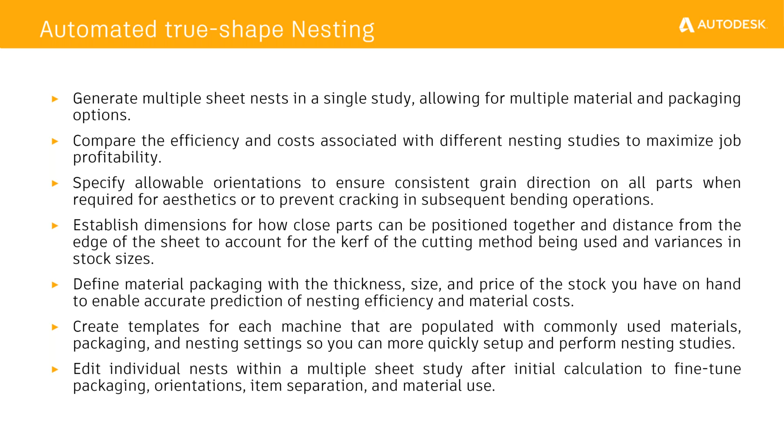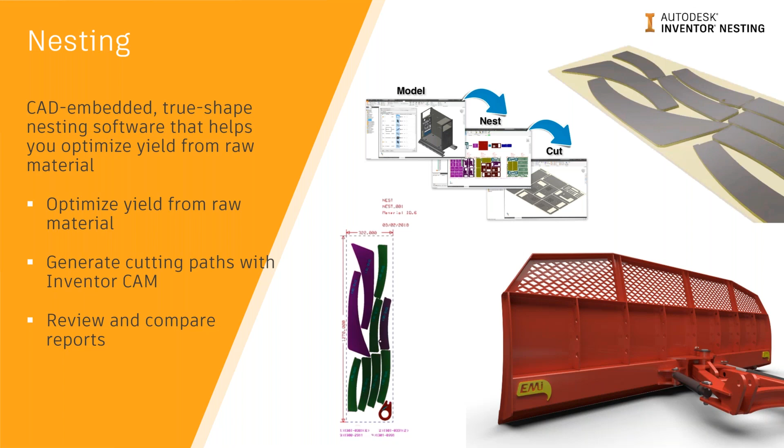Nesting not only reads 3D models and automatically detects flat patterns, but you can also bring in DXFs, which are basically 2D drawings. If you have profiles created in AutoCAD, they can be added on to the nesting, something like a filler part. So nesting is going to use even the 2D profiles, not necessarily 3D, to lay out the nesting for you. As I said, associativity between 3D modeling and the generated nest makes sure that all changes are reflected and taken care of automatically.

All the nesting layouts that are generated can also be exported as a DXF file if that is the format that you need to feed into your CNC machine or the machine that is going to cut it. Or you can use the 3D layout of the nest and generate the NC code using Inventor CAM. And naturally, since it's a professional tool, it also gives you nesting reports, which are very useful to share with the manufacturer.

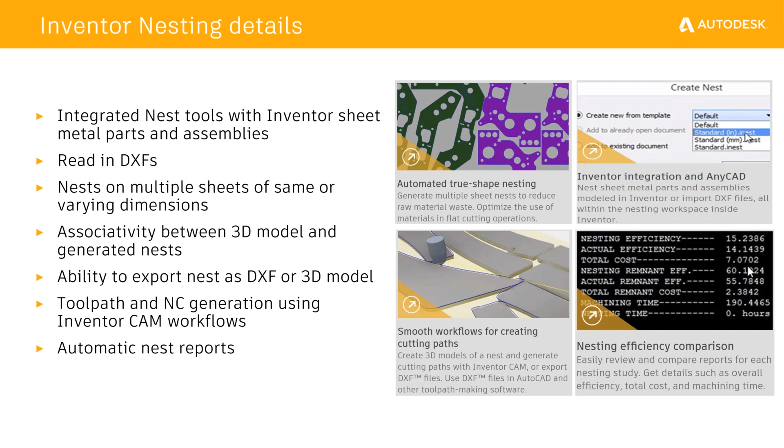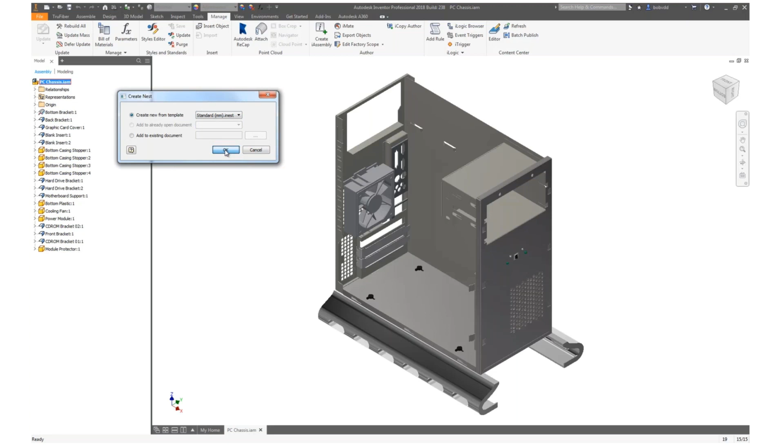Now I will take you through a small example of how Inventor Nesting works through this short video. On the screen, what you see is a CPU console enclosure, which is basically sheet metal. It contains both sheet metal and non-sheet metal parts. To start, we just say create nest and choose the template; in this case, I'm using a metric template. Now nesting is automatically going to detect all the flat patterns as well as the material. Let me just roll it back a little bit to show you. I'm going to pause it here.

Now you see Inventor Nesting has automatically detected two kinds of material. One is mild steel and another is aluminum. But it is showing three categories. Why? Because the mild steel is in two different thicknesses. So nesting segregates it based on the material and the thickness of the material. So effectively in this nesting study, it should generate three different sheets and lay out the flat profiles that need to be cut.

Okay, so let's move ahead. All the flat patterns are automatically detected, and nesting brings them inside the nesting environment and lays them out in front of you. So these are the things that need to be nested.

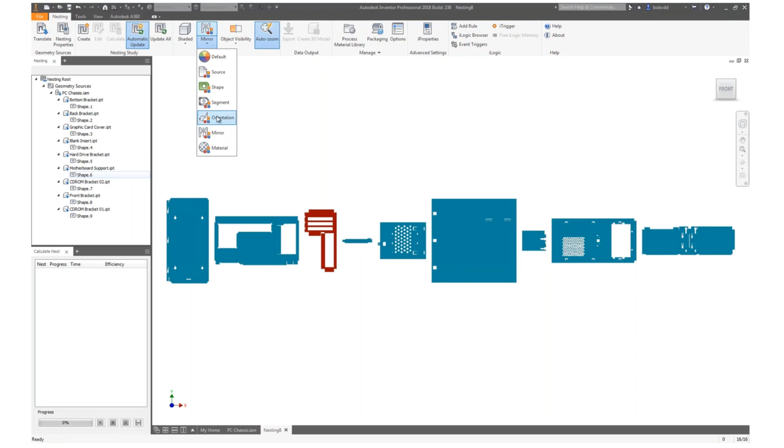The next thing is we just create nesting properties, and you can see it has automatically taken the quantities as well. And here is where you can modify the orientation or the rotation, mirror, etc., to make sure you have the right orientation. Now, you can easily see what has been mirrored and what has been tilted by using the choices as you can see on the screen. So you know which has been modified.

Okay, now the next thing is the packaging. In nesting, it allows you to define the packaging. Packaging is nothing but defining the sheet, the size of the sheet, from which these pieces will be cut. So I have created a couple of packagings, as you can see, 2, 3, 4, etc. So I'm going with the standard, and I specify the job quantity, in this case 5 numbers, and let's go ahead and do the nest.

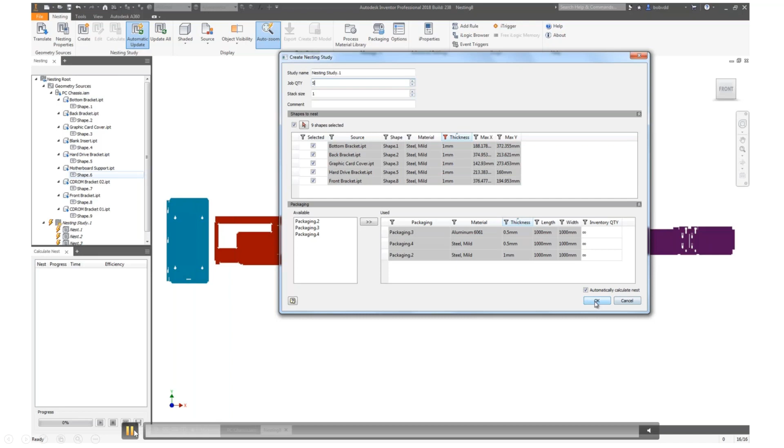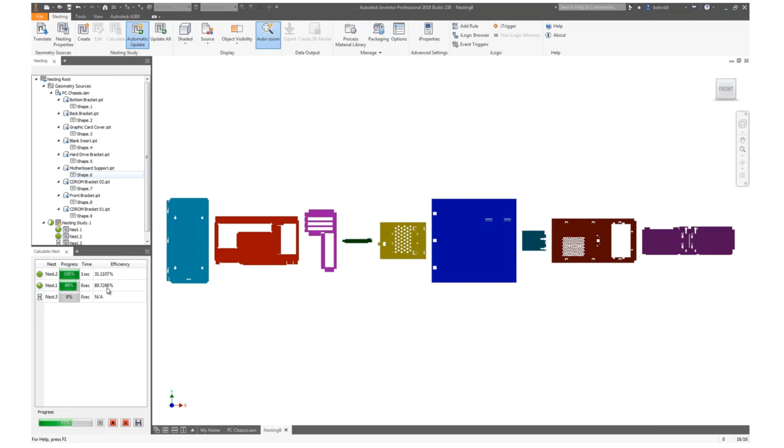Now on the bottom left of your screen, you can see the nesting progress. You see three things, as I said, because there is mild steel and there is aluminum, and in mild steel you have 1 millimeter thickness and 0.5. So as we predicted, it is creating 3 sheets, calculating the nest. This is a multi-threading process. While this calculation is on, you are free to do other things. Once it calculates, it creates the nest, as you can see on the screen.

Okay, so there are three sheets. Let me pause it here. You see the top one is nest number 1, the middle one is the second, and there's a third one. Now you notice that we never specified how many sheets it should use. Inventor Nesting automatically detects if a single sheet is not able to fit all the components. It will automatically add an extra sheet and start placing the components.

So in this case, the top one, if it's mild steel 1 millimeter thickness and it has more components, it's going to pull out the sheet based on the packaging that we defined and try to fit in as much as possible. And if there is something left out, it is going to add an additional sheet and then place the rest. So the top line is nest number 1, specific material thickness, and so on and so forth.

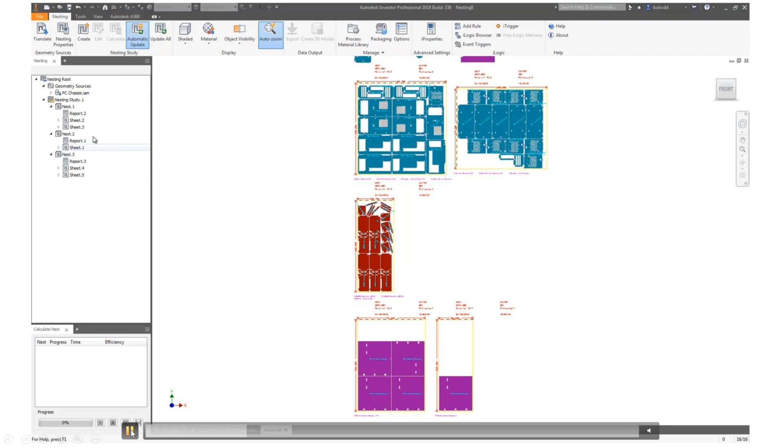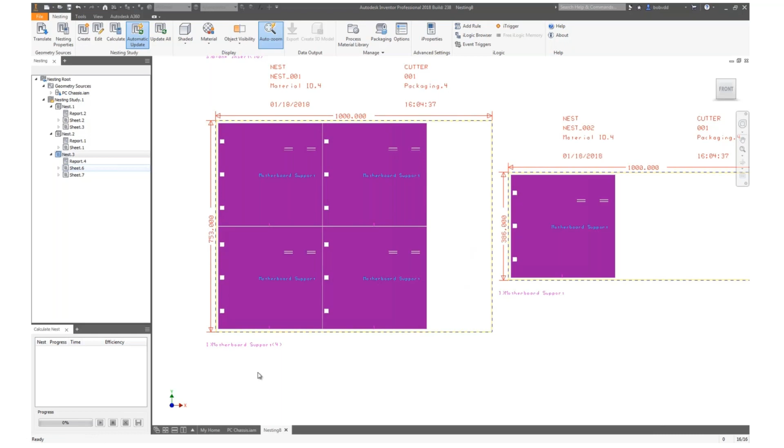Let's zoom in a little bit and see how it has placed. Over here, we can see that this is not aligned properly. So we can quickly go ahead and edit the properties, stop the flipping and the rotation, and make sure that these things are aligned. You don't need to redraw like you otherwise would in AutoCAD. Just by a few clicks and specifying the orientation choices, you will be able to automatically align it.

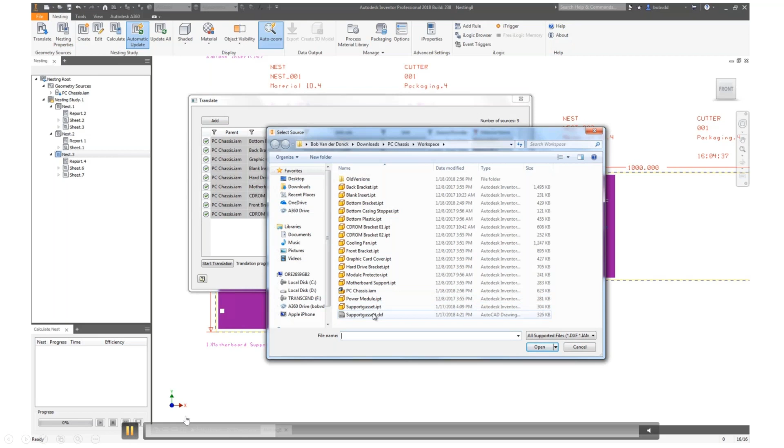Okay. Now, as I said, this is all 3D model, but now I'm going to show you the support for 2D profiles as well. In here, we are going to open the gusset, which is a profile, a DXF, and you can see it has come in automatically. We'll change the units we want and just bring it inside.

Once this is inside, you can see nesting properties. We can assign the material for this gusset based on the packaging that we defined. And since it is a filler part, I'm increasing the quantity to 10, which means 10 of these profiles need to be placed within the nest. So we are creating another study, study number 2, which will have this filler part, a DXF profile. Later on, we'll see which one is the best nest by comparing efficiency, and then choose the right one to go ahead with manufacturing.

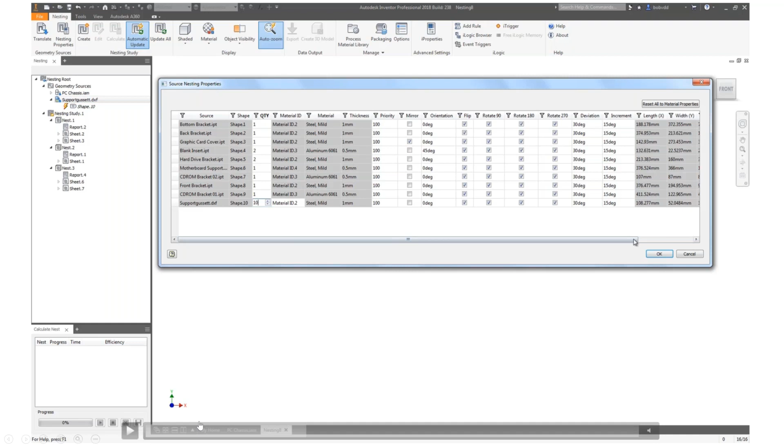So specify the job quantity and say okay. This is the profile, and you can see at the bottom left it is calculating the nest with this filler part, which is a 2D profile. Once this is done, we will compare the nests. First of all, we'll see how Inventor Nesting has used this profile and how it is placing it. Is it using the gaps in between parts, or is it looking for open spaces in the stock? It'll be clear once this finishes.

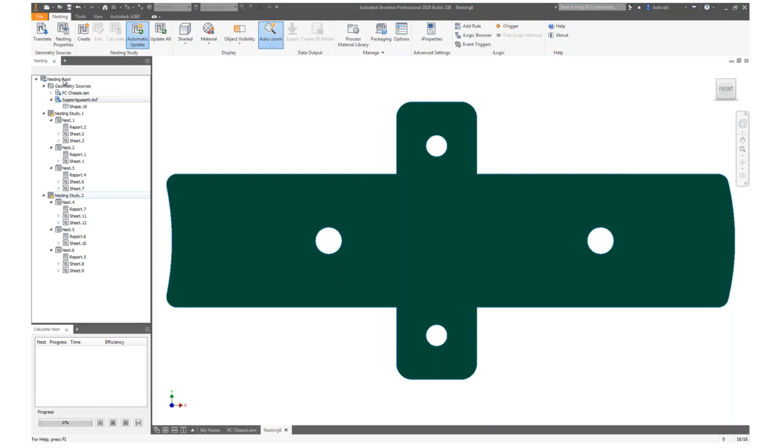All right, so now it is done. So let's zoom back in, and what we'll do is I'm going to hide a few things and compare nest one of study one and nest two of study two. Okay, so here it is. So let's zoom in.

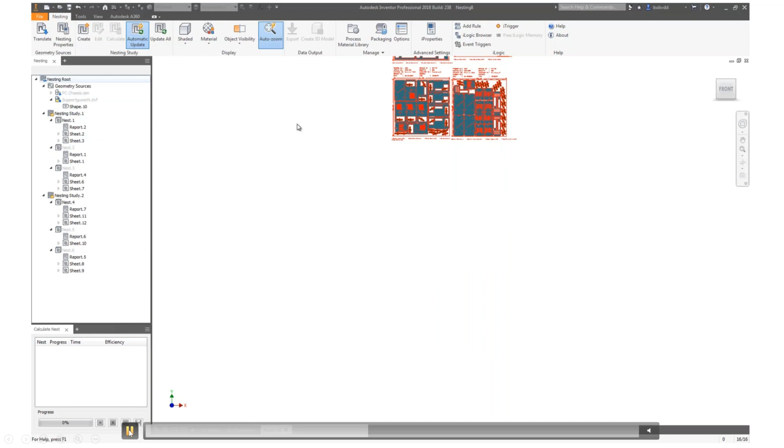Okay. So on the top row is the first nest that we created. And the second row, the bottom row, is the second study with the nest which has this filler part, which is a DXF, and you can see that it has optimally placed these filler parts which need to be cut as well, and it has used the gap between a component as well. So optimum usage of materials; if this is not the case, then this whole piece of material is going to go as waste.

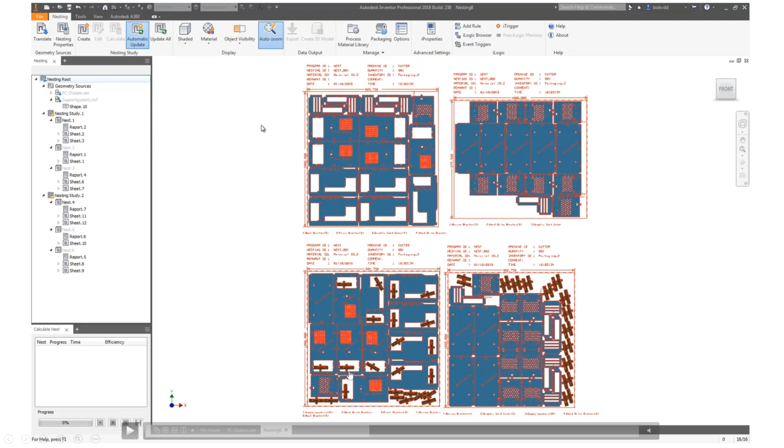Okay, so now the next thing we need to do is check the comparison on the next study, and you can see study one has about 64% efficiency, and let's see the second study's efficiency. So it's gone up to 71. So this is the nest that I'd probably go with.

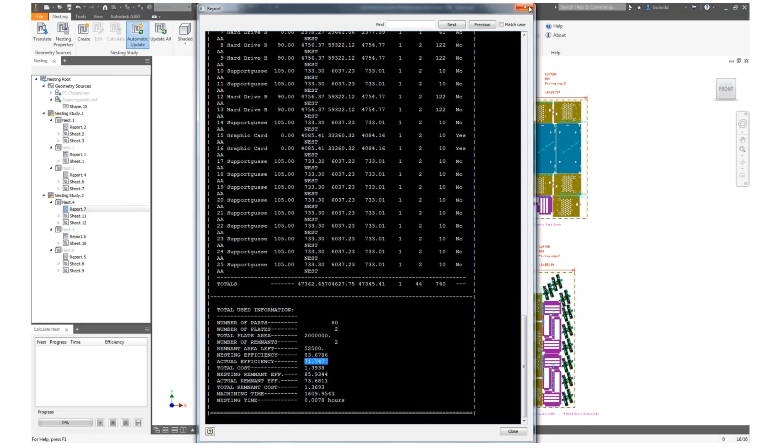So you can have multiple studies created. Secondly, on the packaging, you can add your own packaging. The packaging size has to be very specific to the material that is available in the market. You cannot just simply give a 1 meter by 1 meter sheet, whereas in the market it is available as 2 meter by 1 meter or whatever, so you need to specify that size to make sure that you don't have any problems when you order the stock material.

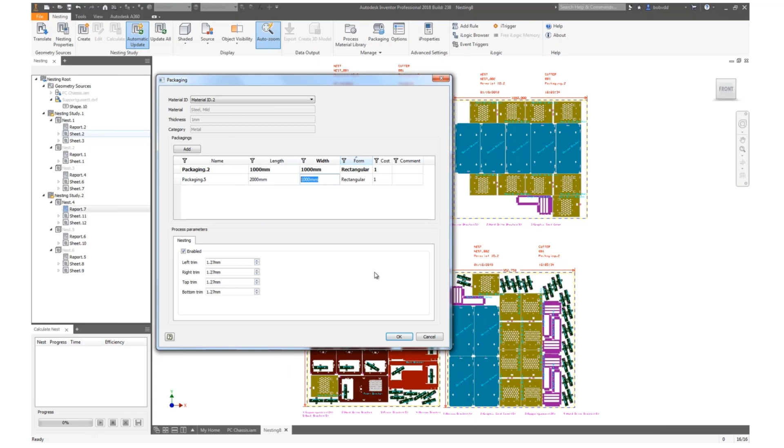So here is where I'm showing you how we can create the custom packaging based on the sizes in the market. So instead of 2 sheets, I would want to have a bigger sheet, let's say 2 by 1 meters, and I add that packaging. Then we go into the specific nest and assign that package that we created, which is package 5, move it up the priority, and say that this should be used rather than the earlier packaging.

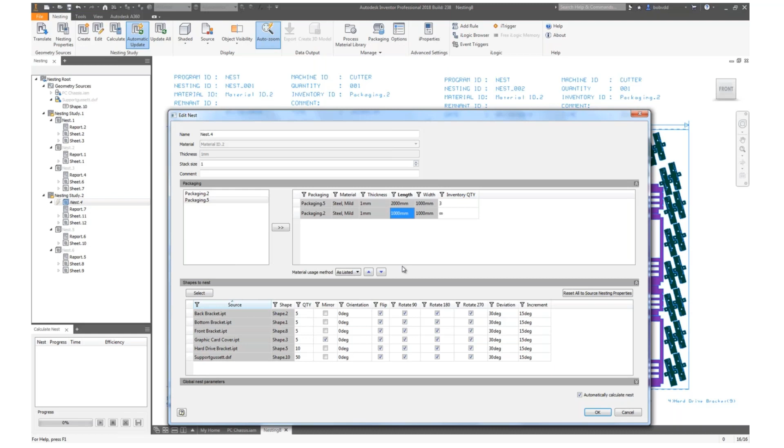So based on this, when we run, ideally it should give us all these parts fitted in one single sheet, which is 2 meter by 1 meter, rather than 2 sheets of 1 meter by 1 meter. So let it calculate. As I said, it's a multi-threading operation, so you can go ahead and check other things. I'm not specifically doing anything here, just to show you how multi-threading works. So you need not wait until the nesting is completed.

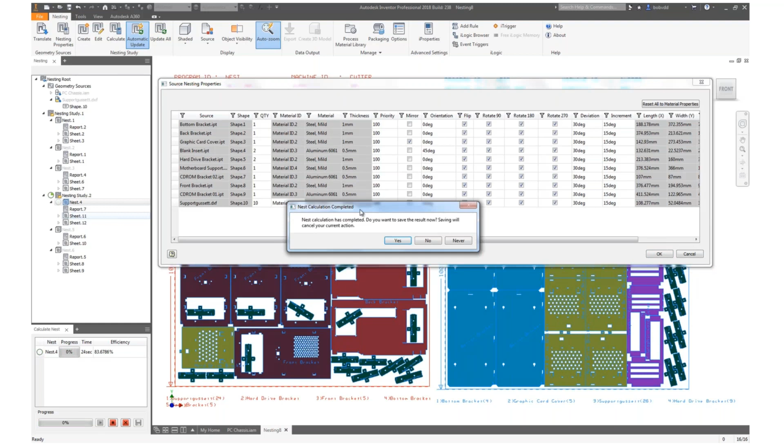Once it is completed, it's going to give you a message saying that it is done, and we accept that. And let's see how the new nesting layout has come. So there should be one sheet now. Okay, there you go. So there is one sheet of 2 by 1 meters wherein everything has been fitted.

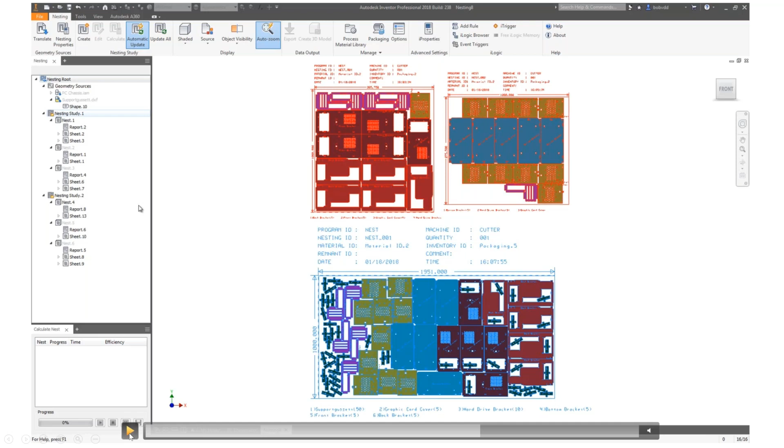And now you see study one, which is the default that we had with packaging at 1 by 1 meter, and study two, where we changed the packaging to 2 by 1 meters, and you can see how Inventor Nesting automatically has optimized the layout of the flat profiles.

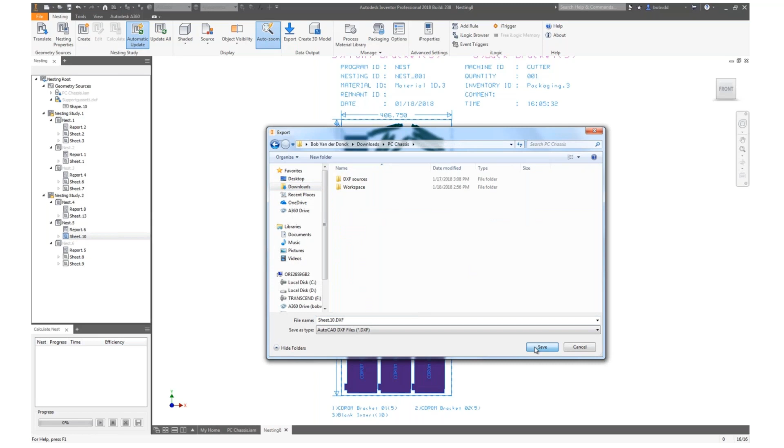Okay, so the next thing we'll do is try and take it to manufacturing. Let's choose this particular nest, and let's go ahead and export. One way is to take it as a DXF file, so if this is what you need, you can quickly save it as a DXF file, open it inside AutoCAD, and use the programs that you use inside AutoCAD to send it to manufacturing. So the whole nesting file has come in inside of AutoCAD. So this is one way.

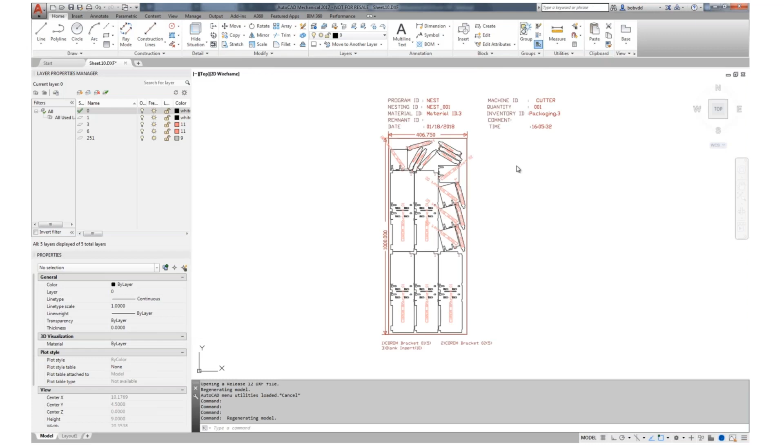And the second way is to convert that as a 3D model, which is a single click operation. We convert that as a 3D model.

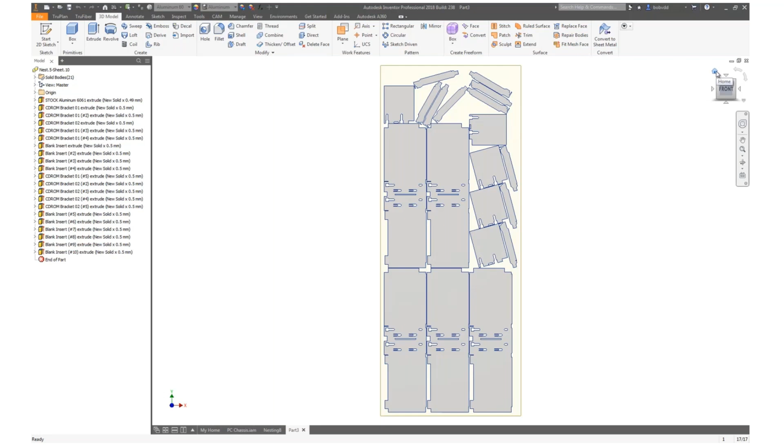And what it does is it converts all the profile with the specific thickness into 3D, and you can also see a stock material that has been built all around it. It's in light yellow color.

Once you're done, use the CAM capability of product design and manufacturing collection again within Inventor. So let's set up this CAM and specify this as the stock point. And go ahead and choose the 2D profile that you want to cut.

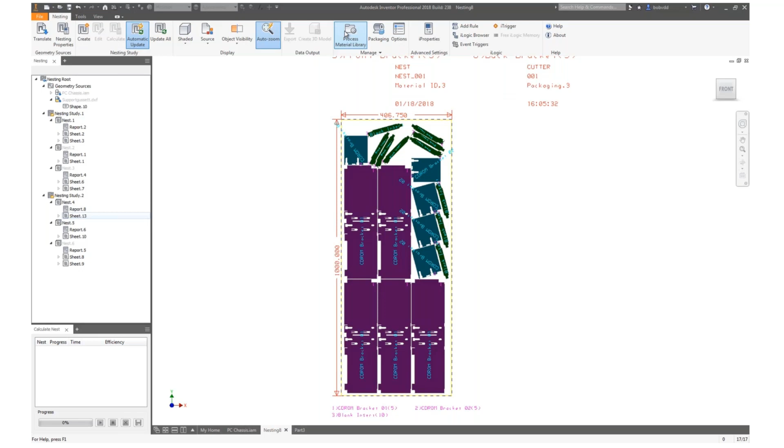There's something called kerf width, which I want you to see. Kerf width is nothing but what we call in packaging, in Inventor Nesting, how much gap should be kept between two items. Here, currently we have a 1mm gap, so when pieces are laid out, it will make sure there is a gap of 1mm maintained. If you need that to be 2mm, you can go ahead and change that.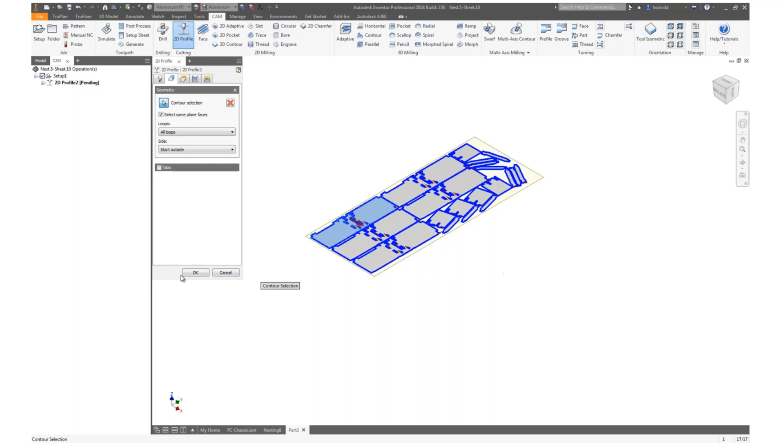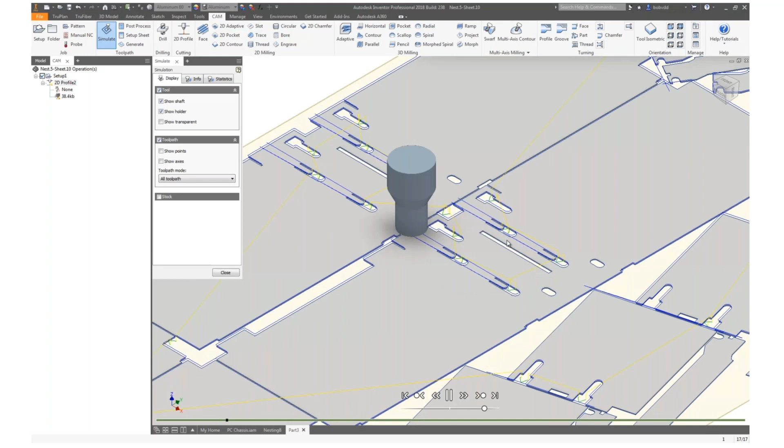So we just come in and use that original kerf width of 1mm here, and select one of the planar faces. It'll automatically select all the faces that have to be machined. So your 2D profile is generated now, and all we need to do is go ahead and simulate, and you can see the machine simulation happening, and then you can take an NC code output based on the machine that you're using. So this is how nesting works.

So the next topic that we'll talk about is tolerance analysis. We all know that tolerance analysis is required, especially when you are manufacturing parts and assembling them all together. That is where you need tolerances specified on each manufacturing part.

Ideally, every part manufactured is the same size. Every part made is fitted into its assembly in the same way and performs the same, just as we designed it to. But in the real world, this simply is not the case.

Materials, equipment, tooling, environment, operator inconsistency can all lead to slight variations which happen. Individually this might not be a problem per part, but incrementally these variations can stack up and prevent the parts from fitting into their assemblies. There is a threat of it becoming scrap as well.

So the question we want to address is, will the parts that make up an assembly always fit together? And is there an easy way to do this?

In high volume manufacturing, it's easier to justify the cost of working out the accumulating tolerances ahead of time, even if you have to do it by hand or in a spreadsheet. The cost is spread over the number of parts manufactured.

With low volume manufacturing, justifying spending the time checking tolerances becomes much harder, not just the cost but the time it would take. Additional time in the design office delays parts going into manufacturing. Sadly, we often try to shortcut the process by setting higher tolerances than needed, or we just don't think about it at all, and the problems get thrown over the wall to manufacturing.

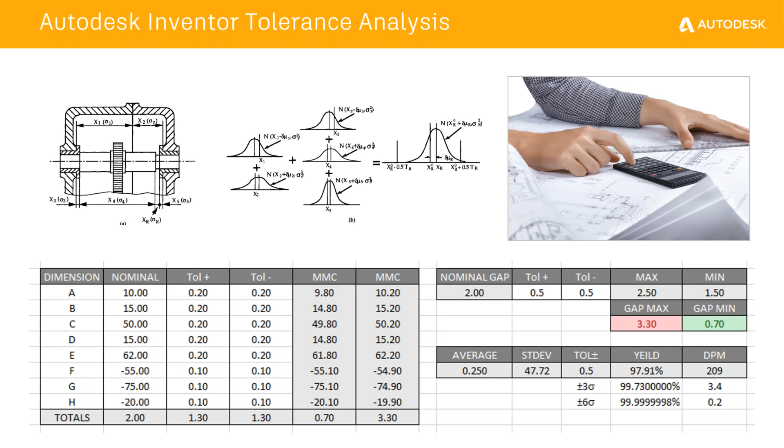So overly high tolerance can increase the cost of the part. Say, doubling the surface finish time doubles the cost, and so on and so forth. More parts get scrapped for being out of tolerance.

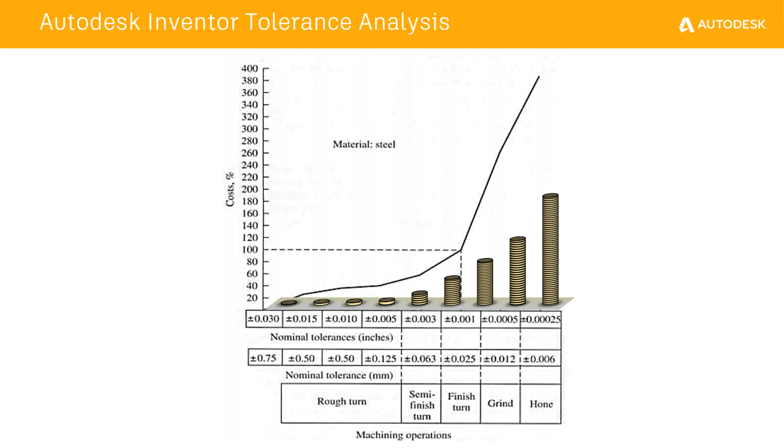If you rely on manufacturing to work out the tolerances, they usually have to make a prototype again, which means it's costing more money. And of course, if no one considers tolerance stack up at all, we are in real trouble down the line. So that's where Inventor tolerance analysis comes into play.

It is a subscription benefit for product design and manufacturing collection subscribers. So if you have this product design and manufacturing collection, you should have access to tolerance analysis as well, which you can download and install from your Autodesk account. Inventor tolerance analysis is designed to help Inventor users make informed decisions while specifying manufacturing tolerances.

It's a CAD-embedded 1D tolerance analysis, which means all the dimensions have to be in linear fashion. It helps you understand the impact of mechanical fit and performance based on cumulative dimensional variation.

So Inventor tolerance analysis helps you measure tolerance stack up in your 3D model to more accurately predict the level of tolerance you need to apply to individual parts, while ensuring that all parts will consistently fit together in the assembly. So let's take a look at an example of how this works.

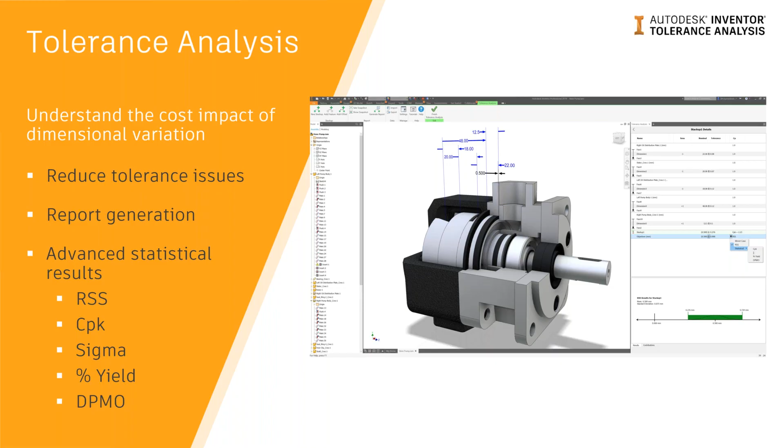So what you're seeing on the screen is a gearbox, and what we are interested in here is... let's move it a little bit. Now what we are interested to do is see how, consider this spacer, and the effect of it, and how it will fit together against the...

So if you open the spacer, you can see there are some tolerant 3D GD&T annotations already specified. Inventor tolerance will consider all of it if you have already specified. If you have not specified, it's fine. You can specify it at a later stage as well.

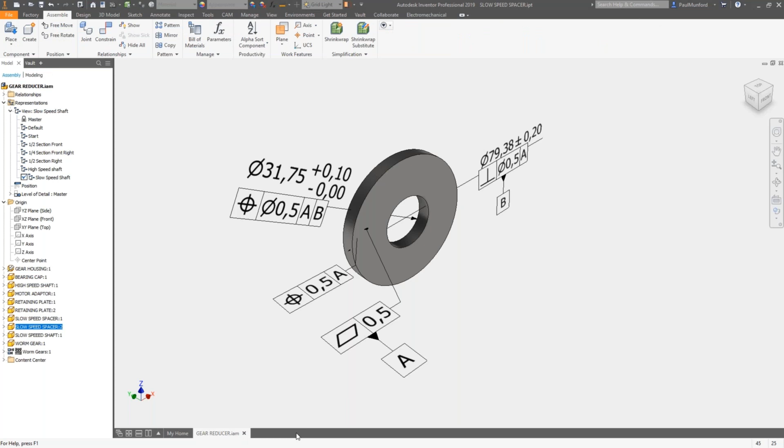So tolerance analysis not only considers this, but it will also make sure that any changes we do on the tolerances, based on inside of Inventor tolerance analysis, also updates this.

So it depends on how you assembled it. There are two ways you can get the objects. This is a part built inside of Inventor, so it has been assembled accordingly. There is a gear cover, there is a retaining plate, and then which presses onto the spacer, then the worm gear. So this is the loop that we want to analyze.

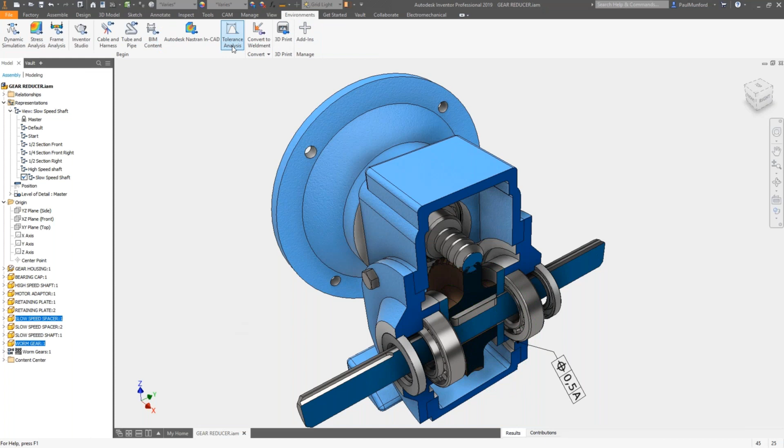If the object is coming out of Inventor, then we'll do it in a different way. So let's go ahead and start tolerance analysis. I already have one study, so I'm going to minimize that. Let's start a new study.

So it all starts by saying create a new stackup on the top left. The part of interest is the gap between the spacer and the gear housing. And then we place the dimension, you can see Inventor tolerance analysis has automatically detected the loop.

So this is one of the unique features of tolerance analysis within Inventor. This is the loop that we want to study. So here is where I told you, if the model was built in Inventor, then we assemble it accordingly, and then we make the loop detection automatic.

But if this is not the case and you are bringing a model from other 3D softwares, you know very well that Inventor can open all 3D models in their native format. So if you open a CATIA, NX, ProE, SolidWorks, whatever models, then the mating will not be there. But in that case, we can go ahead and manually define the faces that consist the loop. So let's go ahead.

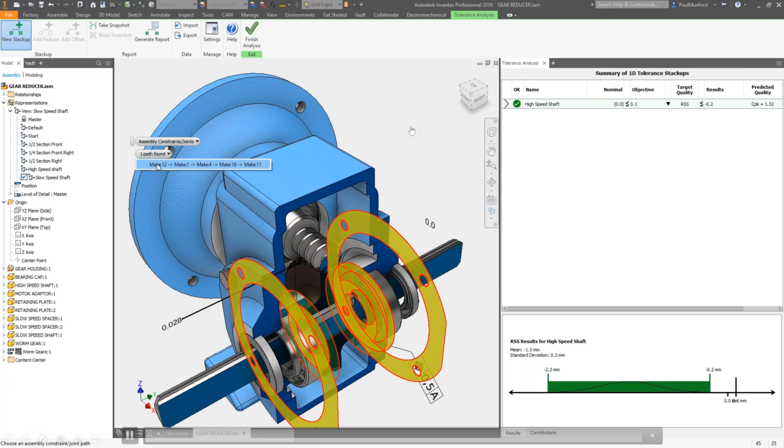We select the loop from here, and on the right side, it should automatically capture all the tolerances of the objects that we created, as you can see on the right. Now, what it shows you immediately is a worst case scenario on the bottom.

Let me scroll down to the bottom. You should be able to see the stack. The objective currently, the gap, is 0 millimeters, and based on this current setting of tolerances, it says if you go with the minimum material condition, the probability is about minus 1.25.

And if you go with the maximum material condition, then there is a plus 1.25 mm, which ideally these two numbers, the stack up and the objective, should be closer.

So let's go ahead and change the objective, because manufacturing with a zero is almost difficult. So let's go ahead and say we will manufacture with 0.25 mm as a tolerance on the objective of the gap that we are trying to analyze.

Now, the second thing we want to know is, with this, it still shows there is a considerable amount of components which is on the red side that may not fit together. So first of all, we need to know which components in the stack up loop are contributing to this. So if you go down to the contributions, it will clearly show you which.

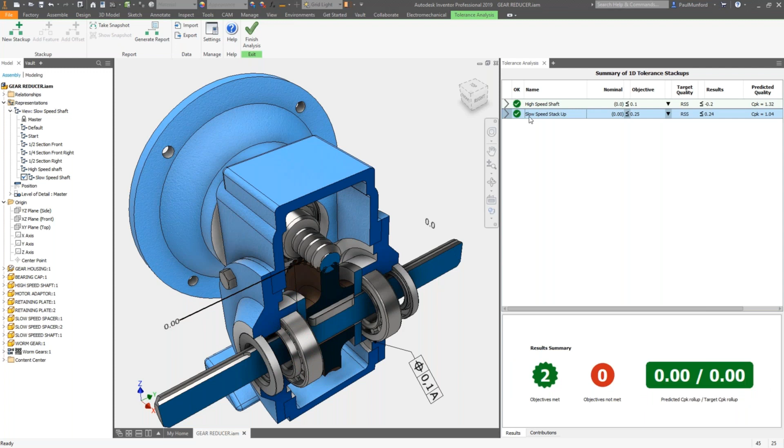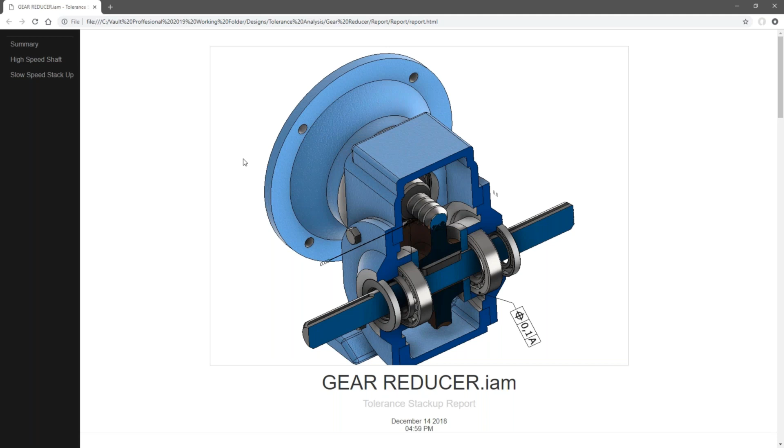So the next thing we want to do is share this with manufacturing shop floor people and let them know that we have done this analysis so that they don't need to do any kind of prototype. Tolerance analysis has a report generation option, so all we need to do is go ahead and generate the report, give it a name, and it will quickly generate a proper report which can be shared with the manufacturer.

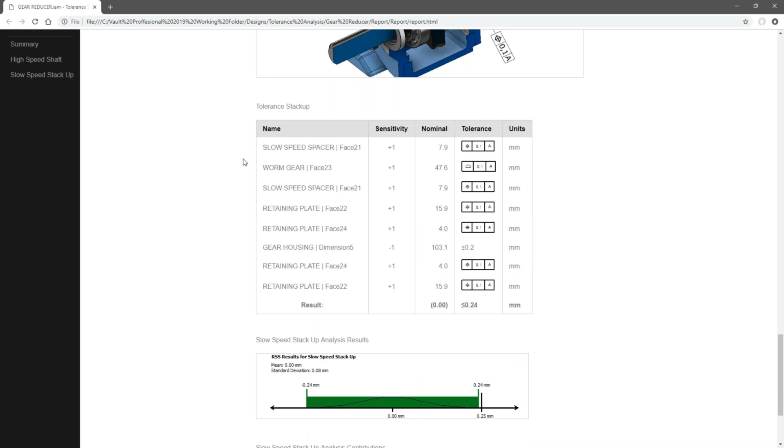So very useful tools. All these tools are otherwise also available separately in the market for an additional cost if you're using different software other than Autodesk. But with the product design and manufacturing collection, it's built right into it, because we know these are all activities you do within a manufacturing organization.

So as we wrap up, I want to note that what we have discussed today is a set of very specific advanced manufacturing tool sets like sheet metal nesting and tolerance stack-up analysis. Obviously there is much more to developing and manufacturing products and equipment. So with the product design and manufacturing collection, we address many other areas that can help you develop your products better. We spoke about nesting and tolerance tools inside Inventor, but also included in the collection is advanced simulation for testing your designs.

The simulation inside the manufacturing collection is Nastran. Then we have 2.5 to 5 axis CAM capabilities and additional tools to help you create efficient factory layouts. So it's an end-to-end solution that all works right inside Inventor, along with complementary tools like AutoCAD and Vault for product data management software. So if you're interested in evaluating ways to improve your design and development process in any of these areas, we surely can help.